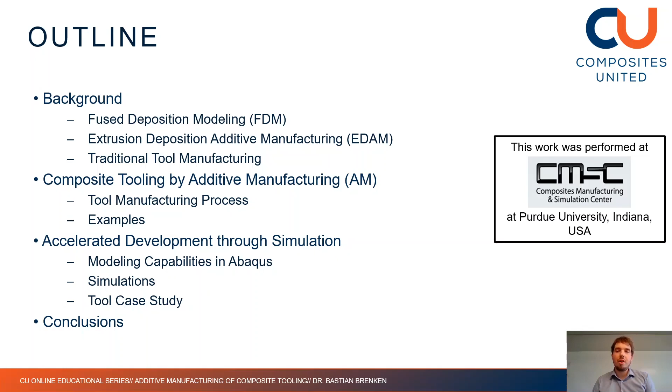Let's start with the background. The fused deposition modeling process, or FDM process in short, is a prototyping technology invented by Stratasys in the early 90s. Typical extruded diameters are 0.1 to 0.3 millimeters, and you can see the process on the right: a nozzle deposits hot molten material onto a printing bed, and by depositing this material you build up a 3D part layer by layer. Typical materials used are PLA or ABS, or high temperature materials like PEI.

The advantages of this process are toolless production of intricate parts - you don't necessarily need support, though for overhangs support material can be required, but you don't need tools. You can build up the part just by putting layers on top of each other. You have significant weight reduction possible by using partly filled layers - you don't need to fill up every layer completely. And it's very easily scalable, as you'll see in a few slides.

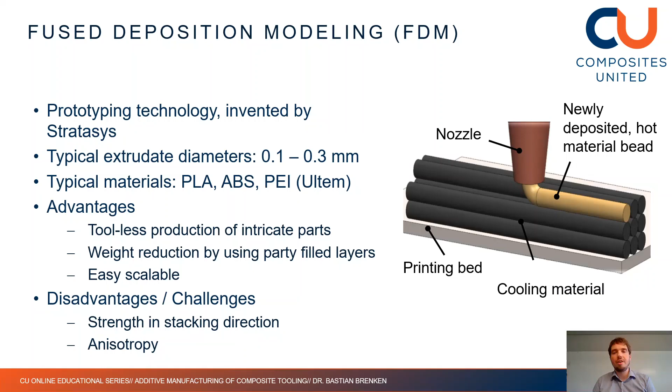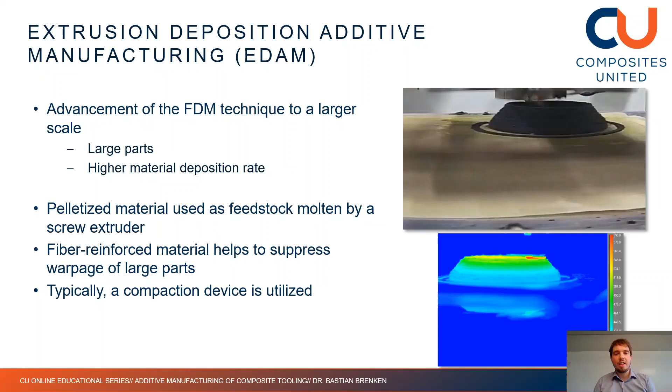Now let's talk about the extrusion deposition additive manufacturing process, which is basically an extension to a larger scale. So you aim at larger parts, and a consequence is that you need a higher material deposition rate. You typically use pelletized material as feedstock rather than filament, which reduces the raw material cost. Fiber reinforced material helps to suppress warpage.

On the right in these videos, you can see the visual image and the thermal image of a buildup where hot molten material is added, and the part is built up layer by layer. Typically a compaction device is also used, and in the thermal video there was a vibrating plate. Let me just start the video one more time.

You can see here a vibrating plate, and you need that because if your bead diameter, the diameter of your deposited extruded material, becomes larger and you put the beads next to each other, you get voids in between because the material does not fill up the whole volume. If you take a circular bead cross section next to another circular one, you get voids in between. So a compaction device helps you push down the material, compact it, and fill these voids.

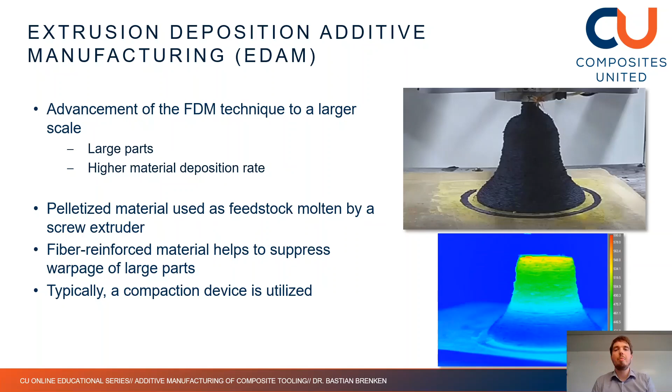If you use fiber reinforced composite materials, then as a result of the printing process and the physics involved, most of the fibers align parallel to the printing direction, shown as the one direction in the diagram on the right. So if you look at a cross section of this extruded material, you see mostly fiber circles and ellipses, because most fibers are oriented in the printing direction.

As a result, you get very anisotropic part behavior, and it's already anisotropic using unfilled materials, as I explained before while going over the FDM process. Now you have this anisotropy already at the level of the extruded material, the bead that you see on the right. As a consequence, you have anisotropic mechanical, thermal, and also flow properties.

The advantages of using fiber reinforced materials are improved mechanical properties, but more important for tooling applications is reduced part shrinkage. If you look at very large parts, part shrinkage alone could interrupt a printing process, and you would not be able to conclude the print. So by adding fiber reinforced materials, short carbon fibers for instance, you can suppress this warpage and conclude the print.

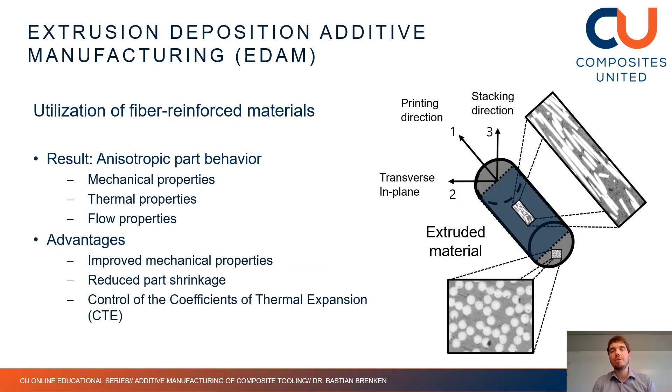Another interesting aspect is that by adding short carbon fibers, you can control the coefficient of thermal expansion of your tool, because as most carbon fibers align parallel to the printing direction, the consequence is that your CTE in this direction is very low. So at least layer-wise, depending on how you orient the layers, you can control how your tool is going to expand in a later heating cycle.

Let's talk about some of the technology that was developed. Typically, if you think about 3D printing, you think about a small desktop printer, but the extrusion deposition additive manufacturing process looks at a whole different scale. On the left, you have the large scale additive manufacturing, or LSAM system, developed by Thermwood, and you can see this big machine in the picture. The build volume can extend up to 30 by 3 by 1.5 meters, so you can print huge parts with this machine.

What's very special about it is that it has two gantries. On one, you have a single screw extruder mounted vertically, and you print with this gantry. On the second, you have a CNC mill. So without having to change the position, you can first print the material and then machine it down to size. This machining step is required because for a tool, and for many other parts, you want smooth surfaces in the end. If you deposit lots of material with a large bead diameter, the surface roughness of the walls becomes significant, so you need smooth, flat surfaces with low roughness, which requires machining after the print.

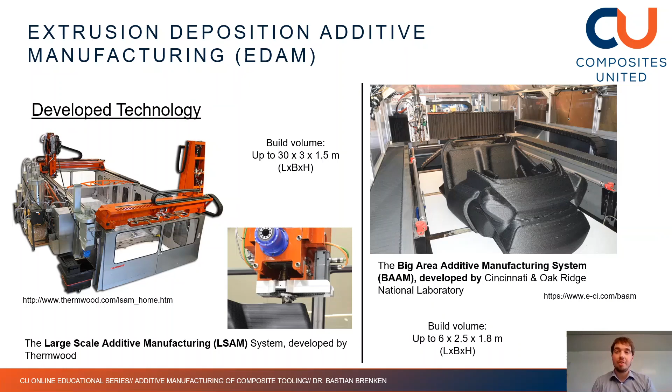On the right, you have the Big Area Additive Manufacturing System, or BAAM system, developed by Cincinnati and Oak Ridge National Laboratory. Their build volume can also be very, very big compared to the standard FDM printers that you're used to.

As the last part of my first part of this talk, I want to talk about traditional tool manufacturing, and I want to make you aware that it's a lengthy multi-step process. First you need to set up a foam block, then you need to machine this foam block and seal the foam to get the tooling master.

For that you need to lay up the composite material, cure it on the foam block, and post-cure it. Take it out, and then finally you need to mount the finished tool surface on a support structure.

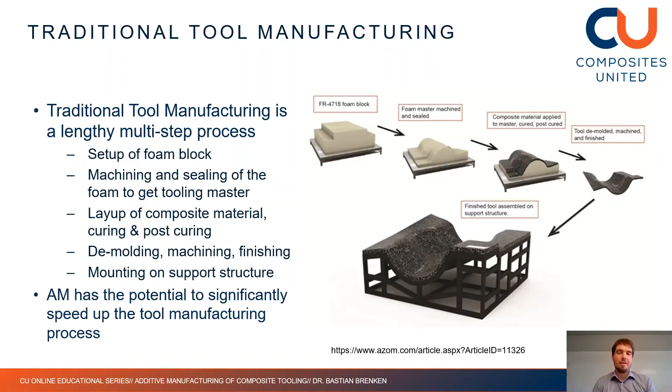So additive manufacturing here has the potential to significantly speed up this tool manufacturing process, and how this is done, that's what I will talk about now.

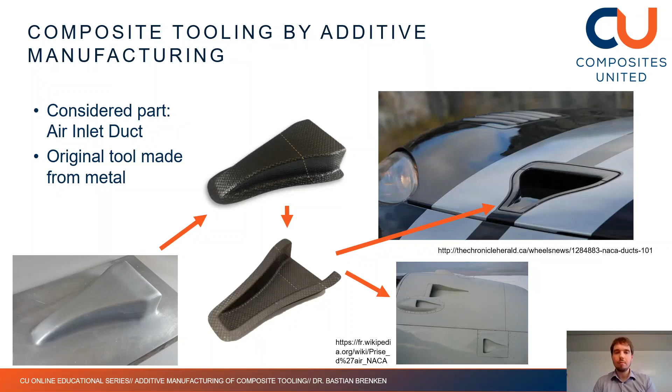Then you have to slice this geometry and transform your continuous geometry to a discrete sliced geometry in the slicing process, where you define your layer setup. As a consequence, you get machine code out of the slicing process that you can then feed into your printer, and your printer will follow this machine code and print your part.

As a last step, to get smooth surfaces, as I just explained, you need to machine this tool. A coating in the end is optional based on your preferences. A coat of course extends the tool life, etc.

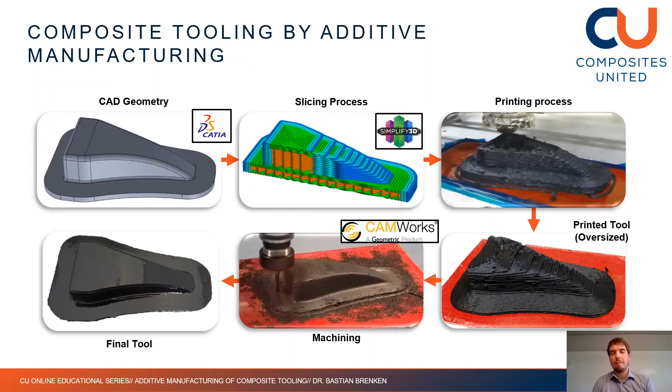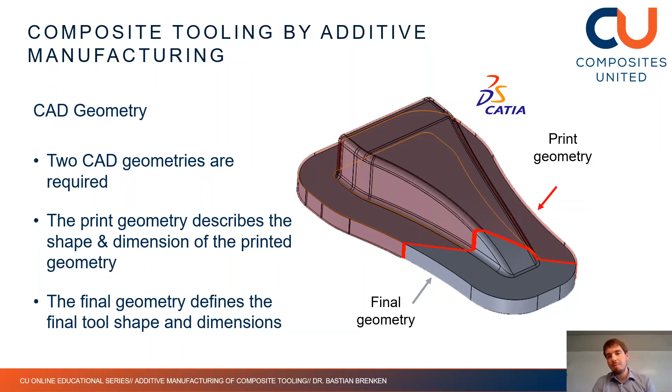So let's go through these steps in a bit more detail. For the CAD geometry, you actually need two geometries: the print geometry that describes the shape and dimension of the printed geometry, and the final geometry that defines the final tool shape and dimensions. The reason is obvious, because you need to machine down to the near net shape at the end. So you print near net shape, and then you machine down to the final shape.

Then the slicing process is the next step. You have many parameters that define your layer setup - printing parameters, for instance your machine, the dimension of your extruded bead, and how fine you can go with these layers that you can print.

Then you have process parameters: printing temperature, print bed temperature, extrusion conditions, and constraints - minimum layer time, and the shortest layer time possible before you get sagging, before the material sags because it's not stiff enough and not cooled enough, and a max overhang.

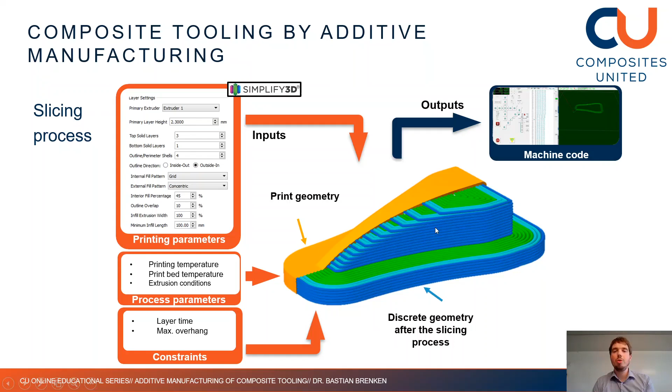So when do you need support material? These are constraints, and you need to feed all these parameters into your slicing program, and your program will then transform the continuous geometry into a discrete geometry for printing. As an output, you get the machine code that you can feed into your machine.

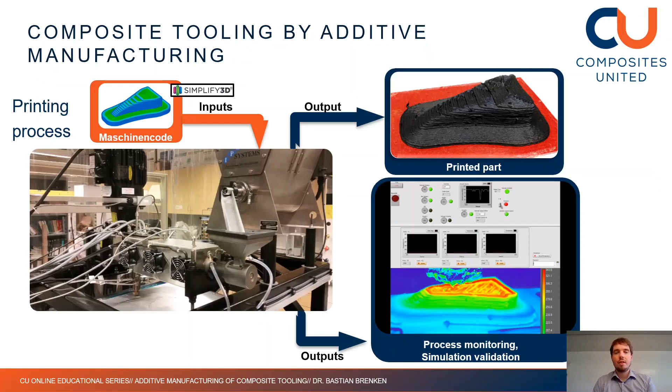Then you have the printing process. Here you will see a video that will start shortly, showing the print of this NACA air inlet duct tool we are talking about. On the left you have the live image, on the right the thermal image, and it's important that this is a well-controlled process. The thermal image gives you process control, and at the same time you can validate simulations with the thermal image.

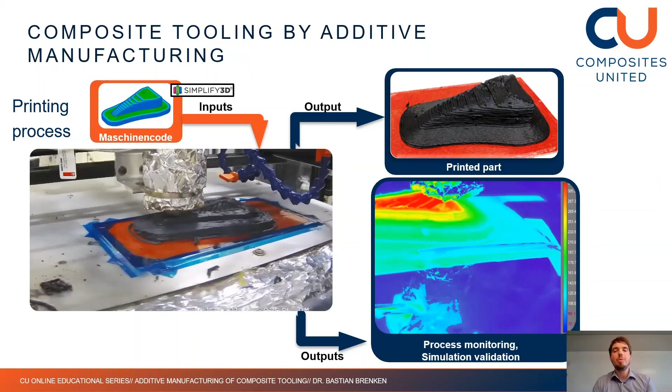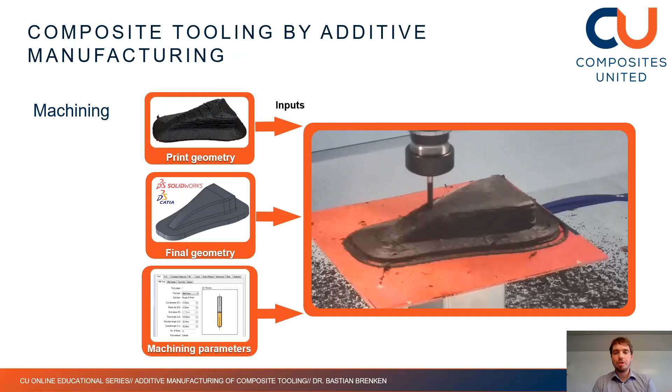After having received the printed part, and at the conclusion of the printing process, you have the machining. So again, you use your print geometry, your final geometry and dimensions, and then you put your printed part in a CNC mill, and machine down to the final net shape that you want. And you need to define machining parameters here again.

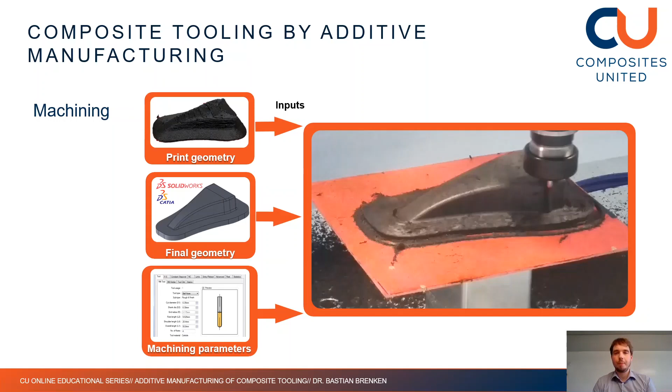For a skilled technician, that's not a big deal. At the end, on the upper right, you see the final tool we just talked about, and a part created with this tool in the autoclave. Using high temperature materials, like the material used here, the PPS material reinforced with 50% carbon fibers by weight, you can definitely print high temperature tools like autoclave tools.

At Purdue we wanted to see how far you could actually take it, and we tried to print tools for different high temperature applications. For instance, thermoforming. On the bottom right you see a printed half hemisphere tool. This is a two-sided tool, with a female and a male part. We heated up a sheet of discontinuous carbon fiber material, put it in, and were able to mold it at higher pressures than autoclave pressures.

Then we went even another step further and wanted to see, can we do compression molding? On the lower left you can see the compression molding tool for a pin bracket that was also shown. So even compression molding with process pressures of up to 30 bars roughly, we were able to do, and we used printed tools for that.

Of course, these tools don't last forever. It's still a thermoplastic material, and this material still creeps when you heat it up and apply a big pressure. Just to give an example, the printed compression molding tool lasted for about 10 cycles and then it broke. But for prototyping, small number series production, or for a tool during the tool development phase, there's still a huge potential that you can see in printing tools.

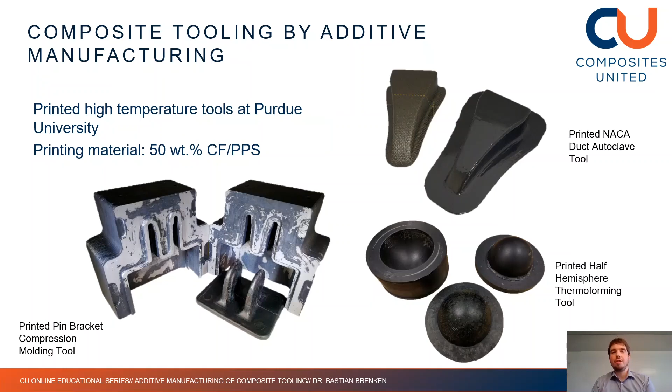Of course, there are also high temperature tools that you can print with the traditional FDM technique. Stratasys, as the developer of this technology, has explored this a lot. They typically, for high temperature material tools, use Ultem 1010, but unreinforced, so it's an unreinforced PEI. Example tools, and produced parts on these tools, you can see on the right.

On the lower left, there's also a very interesting concept: sacrificial tools. You can see this tool on the left that was built up, and then you put a layup around it and cure it in an oven. You get your part, and the core is soluble, so you can remove the core—it sacrifices itself—and get this hollow part in a very easy way without having to machine and build a complicated tool for that. It's a very neat application, and there's lots of potential for tools, as I've said, and this is a good example.

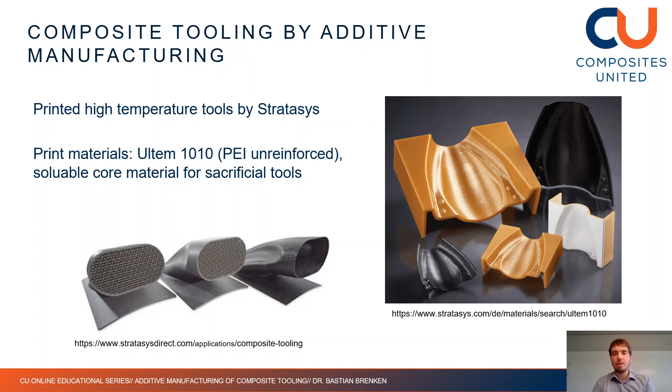Here I want to show you a large-scale example. This is the LSAM system in action. What's being printed here is a helicopter blade tool, a very big tool, approximately 6 meters in length. So it's a whole different dimension than the NACA duct, air inlet duct tool that I've shown you before.

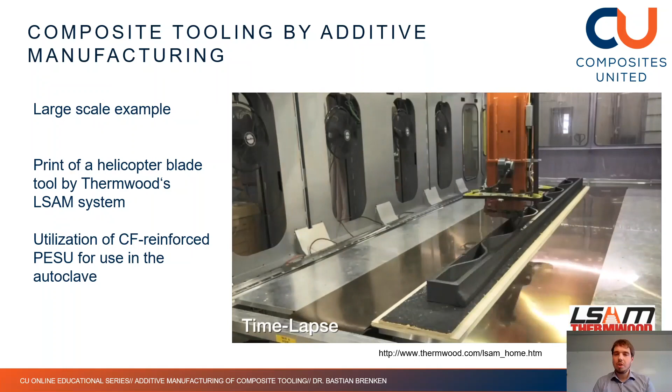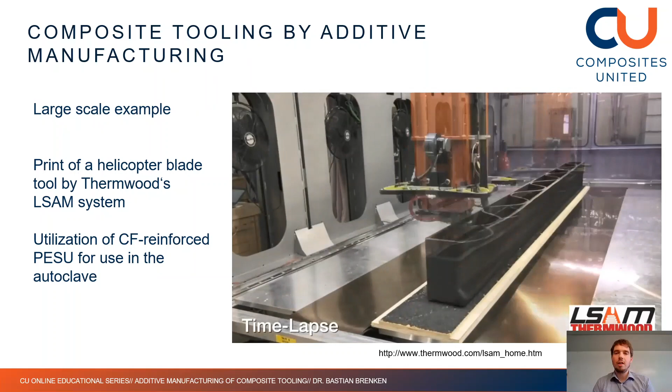Here, the material utilized is carbon fiber reinforced PESU, which is amorphous, and thus it does not shrink as much during the printing process as the semi-crystalline PPS. Now we switch to the time lapse. You can see the build-up. It takes several hours, but still it's much faster to print near net shape and machine to get a final tool than to do it the traditional way that I explained before.

Now the print is finished, and in the same build envelope we can use the CNC mill, the gantry with the CNC mill, and machine the tool down to the final net shape that we want. Put it on the side, machine the actual surface of the blade. You can see this done here.

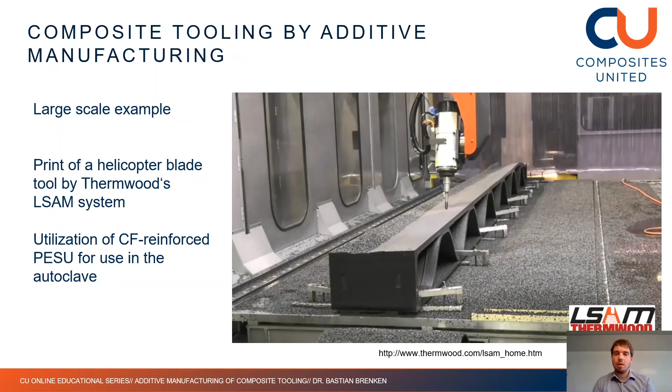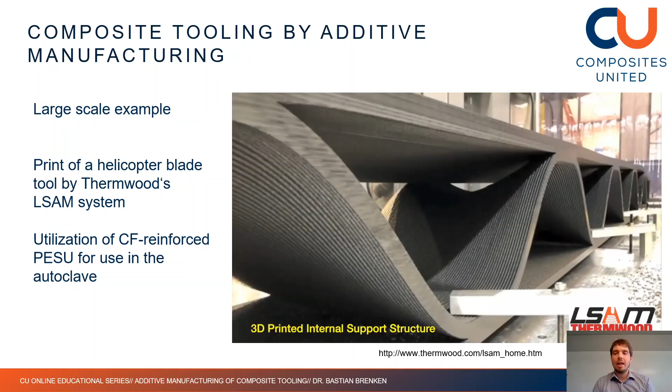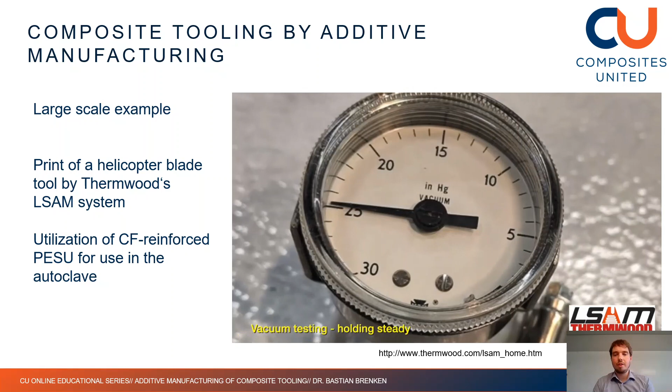A more detailed view on an edge. This is the software that is also sold by Thermwood for the design, the slicer software. And then based on the compaction that you have, the vacuum testing works. It holds the vacuum steady, and you get a tool in a very short time.

These are other examples of large-scale tools. On the lower left, you can see a trimming tool printed with the BAAM printer, the other large-scale printer. For a certain time, it was the largest tool ever made in one piece. You can see here an official from the Guinness World Records committee measuring the tool for the world record.

And on the right, you can see a wind turbine blade tool printed with the BAAM system, but in many segments that were put together. Still, you get a big tool in a short amount of time.

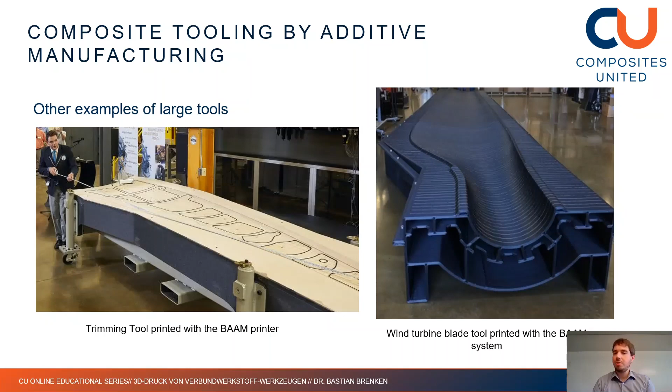Now I want to dive into the simulation part of it. To be able to simulate the printing process, you need basically a new architecture, new functionalities. In Abaqus 2017, these functionalities were introduced, because during a print, material is continuously added. The domain of your part is continuously changing.

So you need to activate elements to depict the printing process correctly. How Abaqus has done this is that you have to define in the first step an inactive part, unspecific mesh. Then Abaqus utilizes the same machine code that you need for the actual print, and it runs the machine code through the mesh and activates elements with the definition of a certain cross section of your extruded material. It activates the elements on the fly.

And then the physics computations are for activated elements only, which keeps the simulation quite inexpensive compared to if you had to compute the physics for all elements for each increment. The description of physics can then be done with built-in tools or custom-made user subroutines.

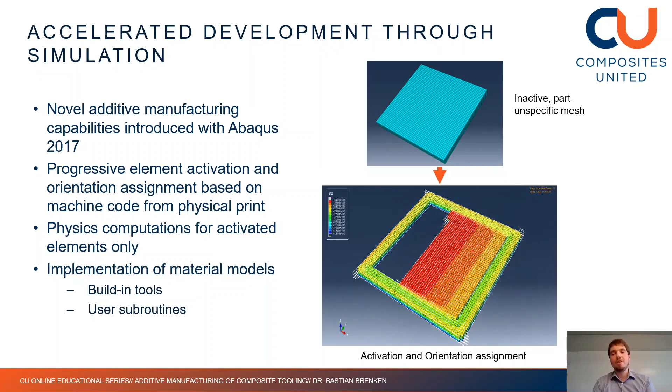At Purdue University, we utilize this novel functionality. By the way, it's built in from Abaqus 2017 and on. So in each version from Abaqus 2017, you have this capability that comes free of charge if you have Abaqus anyway. And from Abaqus 2018, it's also built into the GUI, the graphical user interface.

At Purdue University, we utilize this, as I said, and we build a sequentially coupled development tool, basically. The first two steps of simulation are very identical to the physical printing process. So you start with the geometry, you get the print geometry, and then do the slicing process to get the machine code. And this machine code is then fed into two sequentially coupled analyses.

First, we have a heat transfer analysis to compute the temperature field throughout the process, to compute how the material cools down. These transient results, along with the machine code as well, are then fed into a second analysis where you compute crystallization behavior of a semi-crystalline polymer if you have one, and also the mechanical analysis, looking at stresses and deformations.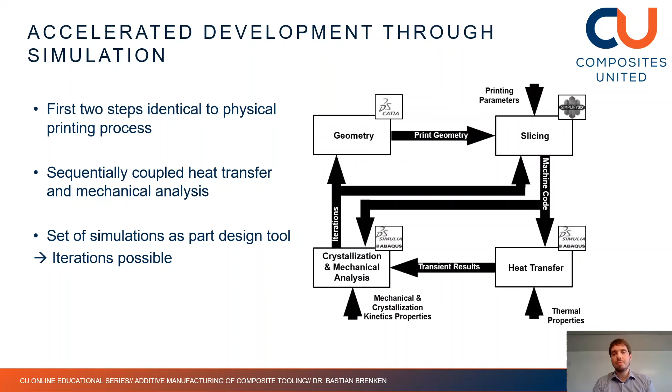If yes, fine, you can go ahead and machine it to get to the final shape. If not, you can redo this virtually, and you don't have to spend these big amounts of material as we've seen for the big scale parts and tools. You can just do it virtually. So this is a very neat thing, and in our opinion was very essential to making this a real option to produce tools.

Here's then the simulation. On the left you can see the temperature, and on the right you can see the deformation. So the elements are activated at the extrusion temperature and then cool down. And on the right, the tool is first attached to the printing bed, so the deformation is really low. But after conclusion of the deposition process, you can see the tool being disconnected from the printing bed, and then it's approaching its final deformation state. You can see here a whole deformation magnitude of 0.6 millimeters.

That's not very big. If you imagine the tool itself has a length of roughly 15 centimeters and a width of 6 to 7 centimeters, then 0.6 millimeters seems fine considering the machining step still required after printing. But if you think about bigger tools, like a helicopter blade tool, these magnitudes can turn out to be very much larger and very significant.

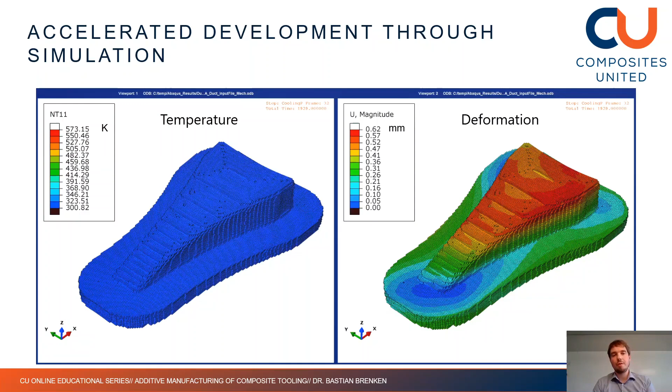So simulation is an essential part of the whole thing. This is also shown by this tool case study. What we did, we took this part, the CAD geometry, and defined two infill patterns, two printing patterns: one with sparse infill, where not each layer is completely filled, and another with solid infill on the right.

Then we did the sequentially coupled simulation, and on the left you can see a very different final deformation state than on the right. Here we are looking at the U3 deformation, so the deformation in the Z direction.

It's interesting to note certain behavior on the left. Your maximum orientation of the curvature follows somewhat this infill, which makes sense. So we have a very similar angle here, and on the right it's not perfectly symmetric, but it's pretty symmetric compared to the left with the sparse infill. So it kind of makes sense how the material behaves.

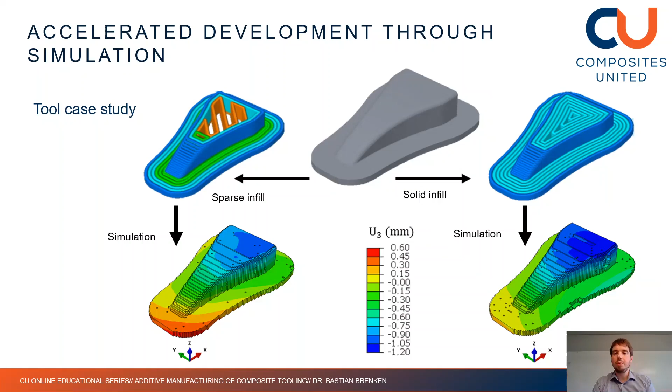But this gives you a good impression of how you can use the simulation as a design tool to design your tool before you actually print it.

So in conclusion, extrusion deposition additive manufacturing with fiber reinforced polymers was adopted by many companies, and you saw the large scale printers that were developed, which are a whole different thing than the desktop printers that have existed for 20 years. Mid and large scale composite tooling was printed, and parts were taken from it and manufactured, both for low and high temperature applications.

In addition to the machine technology, simulations were developed, and these simulations can act as a design tool and enable virtual tool development before the actual print. So they come in really handy and are especially valuable if you look at large scale tools and lots of material that needs to be put down, which you can save by doing a virtual analysis first.

So I think in conclusion, these combined capabilities allow significantly faster tool development, and they are especially interesting for very small number series parts, where the tool costs make up a significant amount of the total part cost.

So with this, you can really move tool development from months until you have a tool ready, to days until you have a tool ready, by just printing your net shape and then machining. Based on that, you can save a significant amount of cost, and as a result, low series, low volume composite parts may become feasible based on this technology.

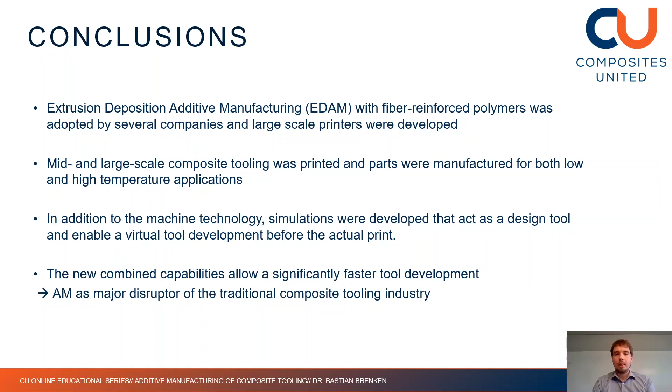So what's next? You're wondering, okay, these large-scale printers look nice, but it's probably a significant investment. And the answer is yes, it is. Also, running the simulations the right way, considering the anisotropic material physics correctly and implementing them into the simulations, for that you need know-how and experience.

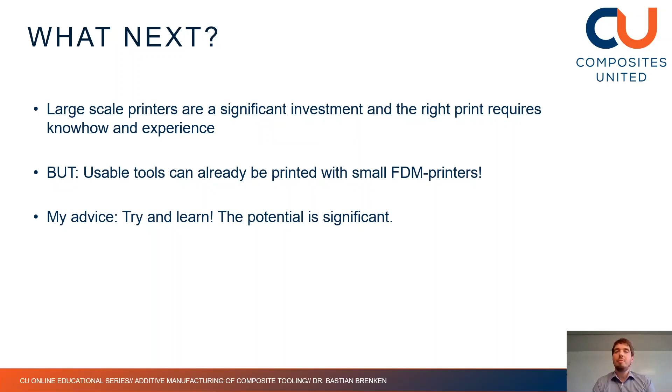However, usable tools can already be printed with small FDM printers. I've shown you some professional tools made on Stratasys printers, but even with your desktop printer, for low temperature applications, or think about trimming tools for small parts, you can just go ahead and try to 3D print them. My advice is: do that, try and learn, because I think the potential is significant. You should definitely keep additive manufacturing in mind for producing and manufacturing tools.

With that, I'm at the end of my presentation.